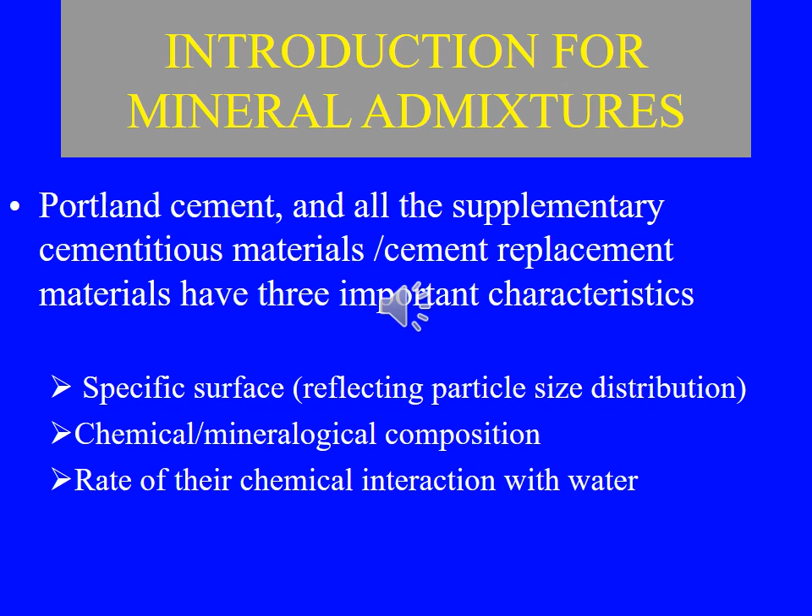For most of them, these properties include particle size distribution, chemical and physical properties, rate of chemical interaction with water, and other materials present nearby.

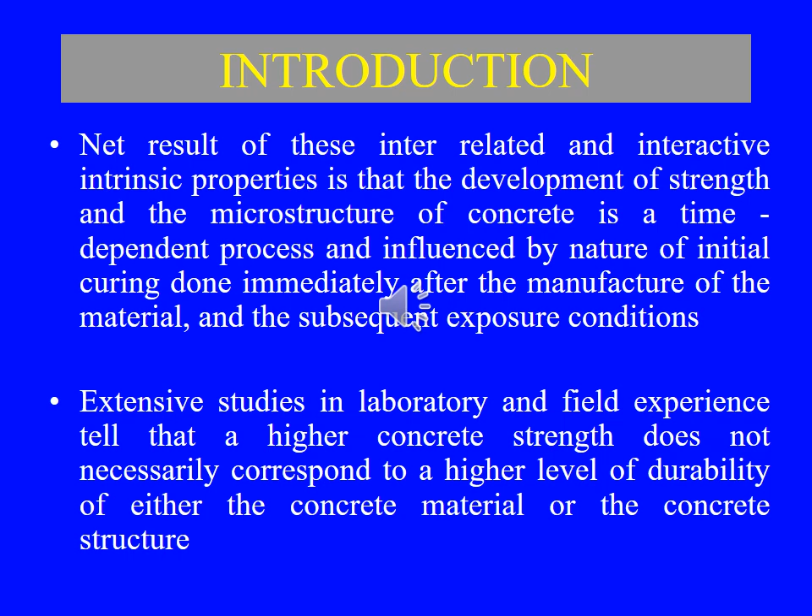The net result of these interrelated and interactive intrinsic properties is that the development of strength and the microstructure of concrete is a time-dependent property, influenced by the nature of initial curing and the properties of these materials, etc.

While initial strength development has its own advantages, like removal of formwork and speed of construction, the durable service life of structures mainly depends upon impermeability, that is, how much is the rate of ingress.

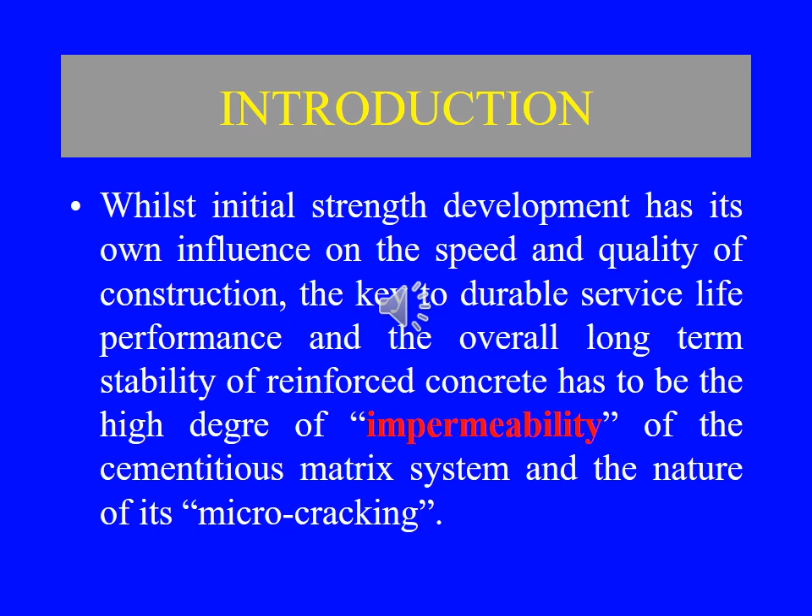of moisture and other ionic substances into the concrete. Cementitious systems involve either only cement, or cement concrete.

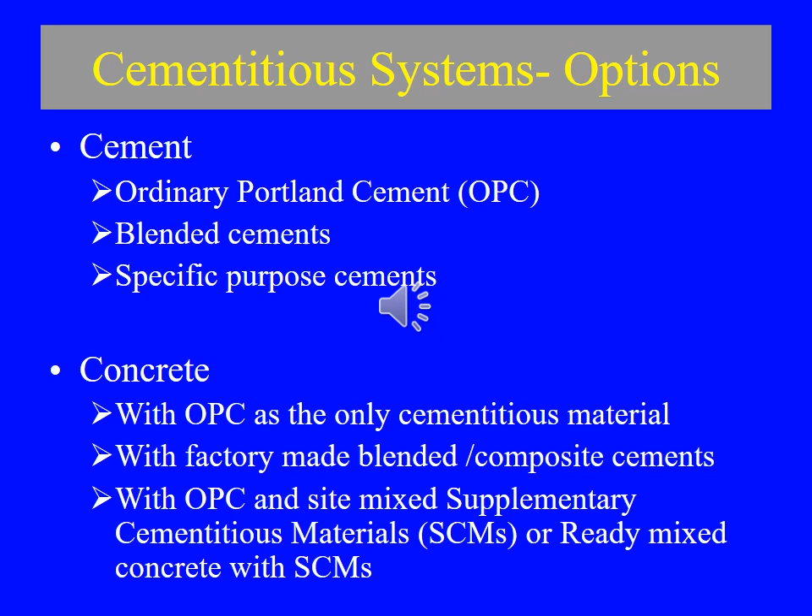To understand the role of the SCMs in concrete, first let's understand the chemical and physical properties of cement.

As we all know, the major component of cement is, by mass, calcium oxide, that is around 64%.

Fineness of the cement is around 290 to 310 meters square per kg, particularly ordinary Portland cement of 43 grade sold in the country. Average particle size of the cement is between 20 to 30 micrometers, that is the D50 - the 50% particles in a given mass of cement are smaller than this size.

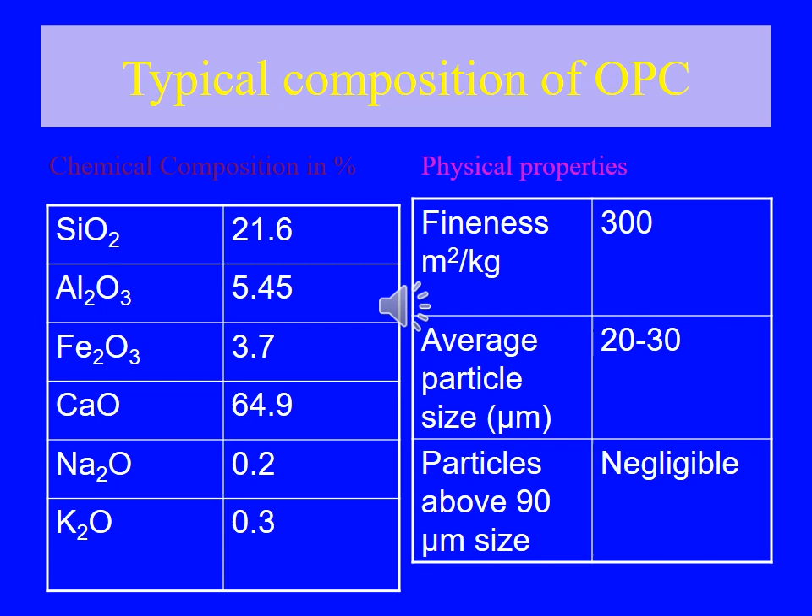This slide shows the properties of cements world over. Belite cement is another name for low heat cement.

Type 1 cement has been the highest type of cement sold in the US, and CEM 52.5 is analogous to OPC 53 grade cement sold in India. CEM 52.5 is a brand of cement, particularly a type of cement in Europe.

This table shows that all these cements, particularly OPC 53 grade, ASTM Type 1, CEM 1, etc., have C3S greater than 50% or so.

As we all know, in ordinary Portland cement, the C3S plus C2S content should be in the range of 70 to 75% for it to be durable.

Hence, only in belite cement is C2S more than 50%, whereas in all the other 53 grade cements, or cements analogous to 53 grade world over, the C2S content is of the order of 20% or so, or even lower than 20%.

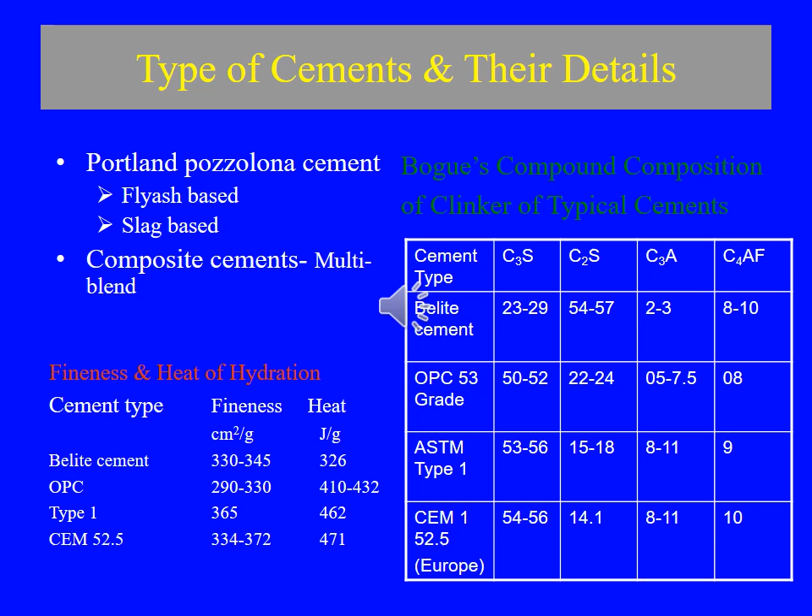A major weakness of cements, particularly type 1 grade or OPC 53 grade, etc., is that they are manufactured for strength, leading to high strength gain at early age.

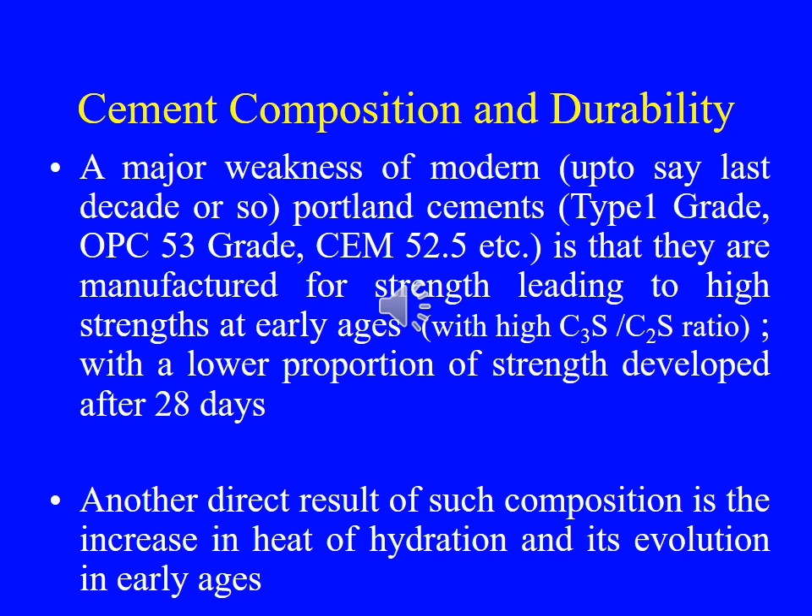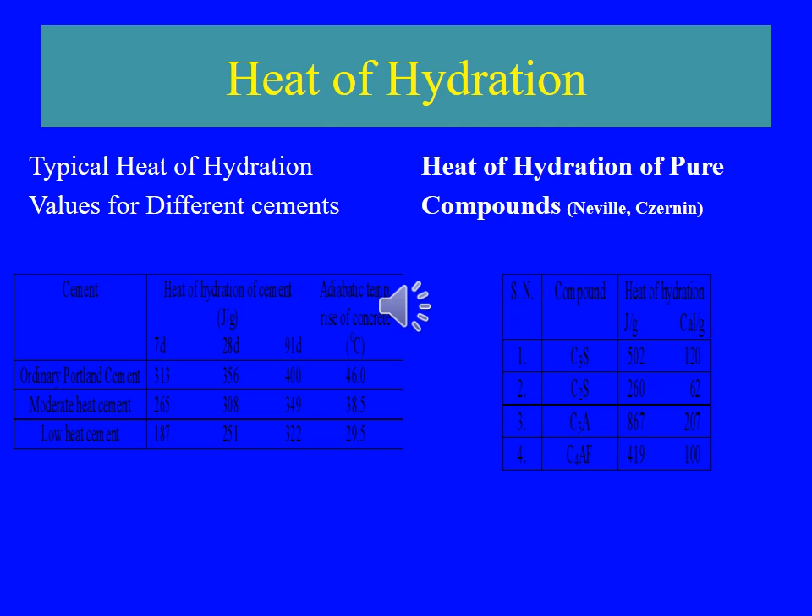As can be seen, in the case of low heat cement, the heat obtained is around 60% of OPC, and as can also be seen, the heat of hydration of C3S is about 2 times that of C2S.

As can be seen, with the addition of fly ash, the heat of hydration can be reduced drastically. These two figures illustrate this.

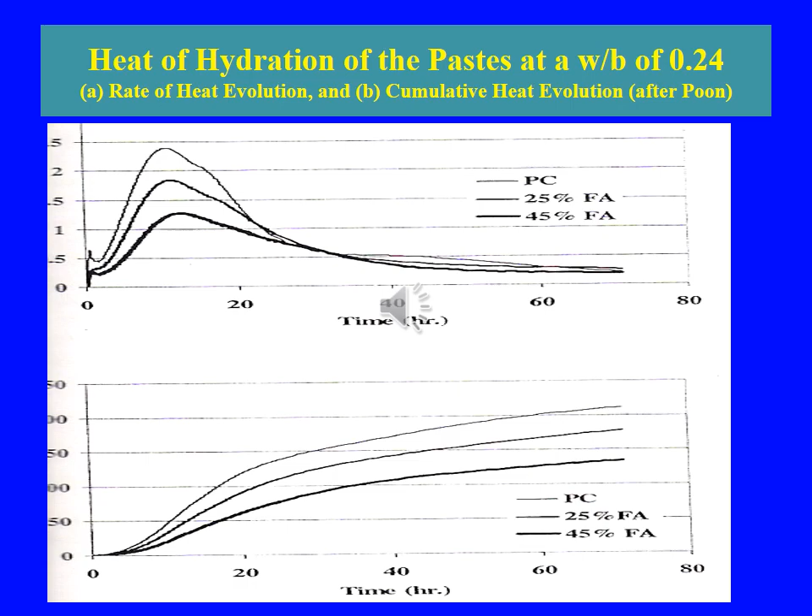Increase in peak temperatures and their much earlier occurrence can give rise to undesirable thermal gradients, and these can create micro cracks in the concrete.

These micro cracks can develop further when loading comes over the structure, and turn into wide cracks. These get interconnected and form paths of ingress of moisture or ions into the concrete.

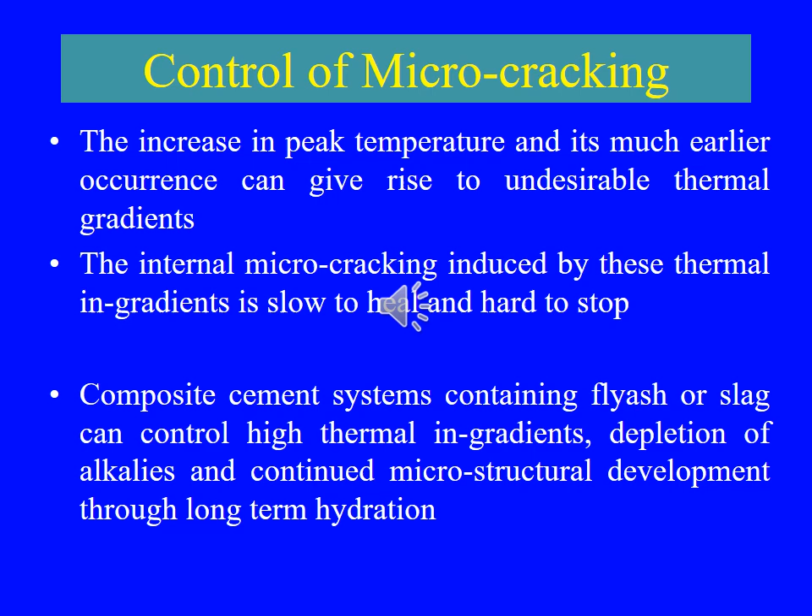With addition of fly ash or GGBFS, not only can the total heat of hydration be reduced, but also the kinetics of reaction, that is the heat of hydration evolution rate, can be decreased, and heat may be evolved over a wider length of time.

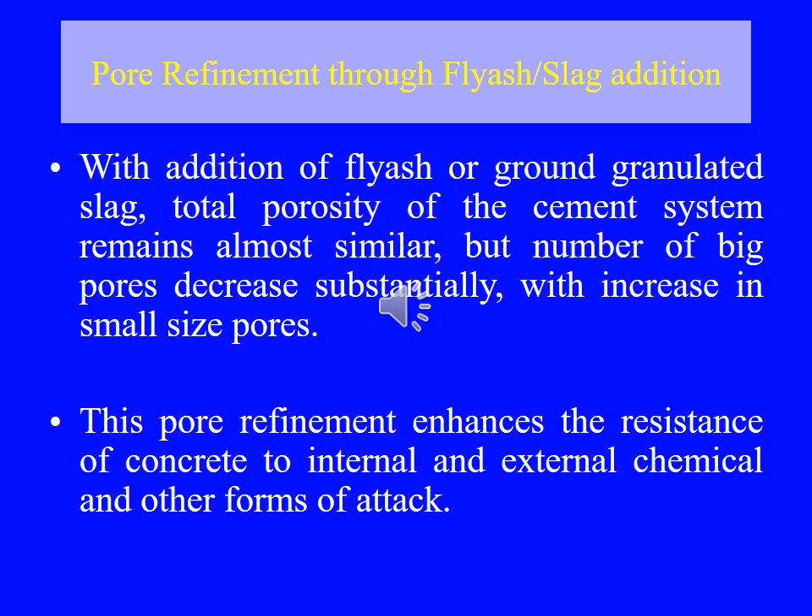This results in lesser microcracking in such concretes containing these materials. So now we discuss supplementary cementitious materials.

Mainly 4 materials shall be discussed.

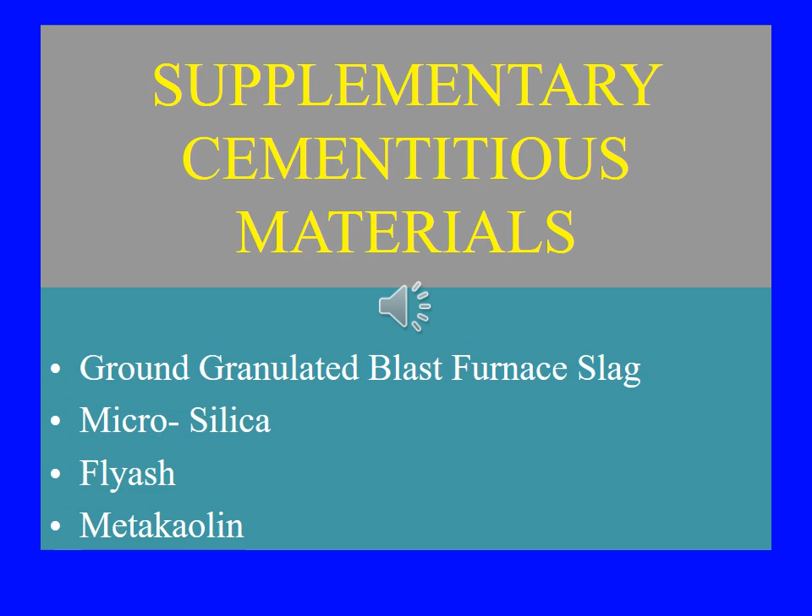Let's first discuss ground granulated blast furnace slag in powder form. Furnace slag powder is a byproduct obtained in the manufacture of steel or in the iron industry.

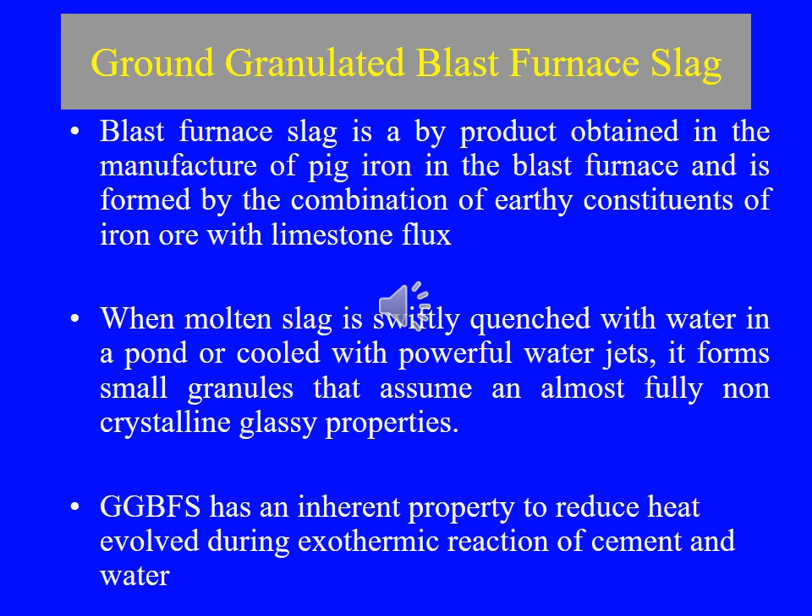This generally contains a property which reduces heat in the exothermic reaction of Portland cement during cement hydration. The properties of slag mainly relate to its fineness, and the fineness of grinding affects its reaction mechanism in concrete.

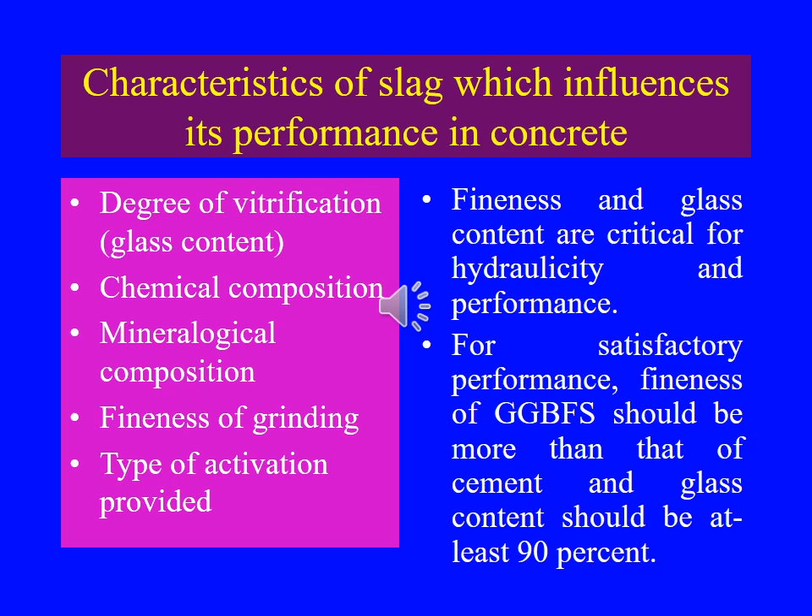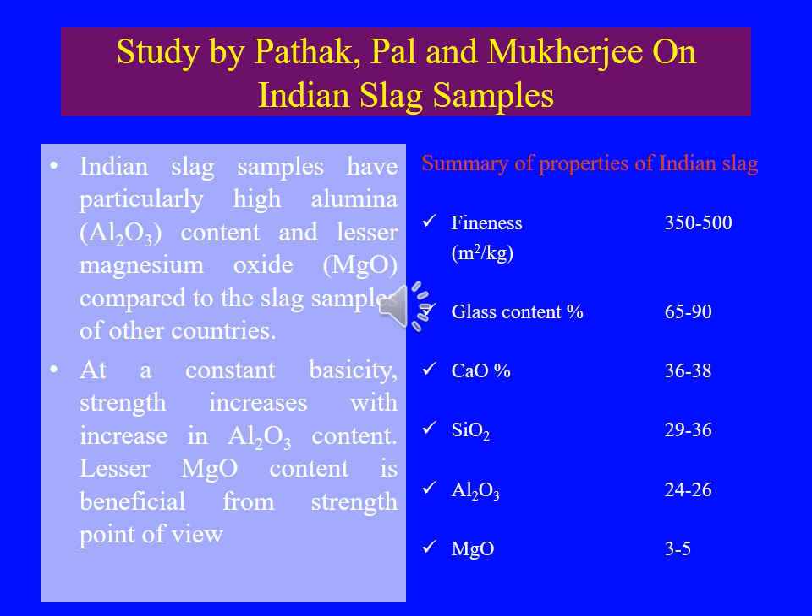Indian slag is generally of fineness greater than cement, and its fineness generally varies between 350 to 500. Because of its high fineness and quality control, we have been exporting slag powder for the last 2 decades to other countries. The price of such powder even in the country is at least equal to that of cement.

Micro-silica is a high-end product which has been used for the last 3-4 decades all over the world. Micro-silica is also known as condensed silica fume, particularly when it is used in liquid form.

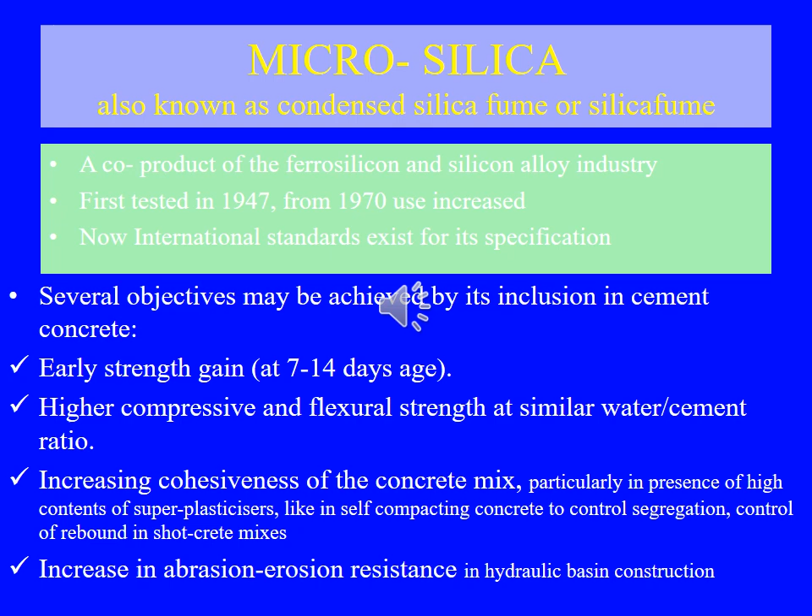The term micro-silica is used when it is used in powder form. This is a co-product of the ferrosilicon and silicon alloy industry. It is mainly used for early strength gain, increased abrasion and erosion resistance in hydraulic structures, and for increasing cohesiveness of the concrete mix, particularly in the presence of high contents of superplasticizers.

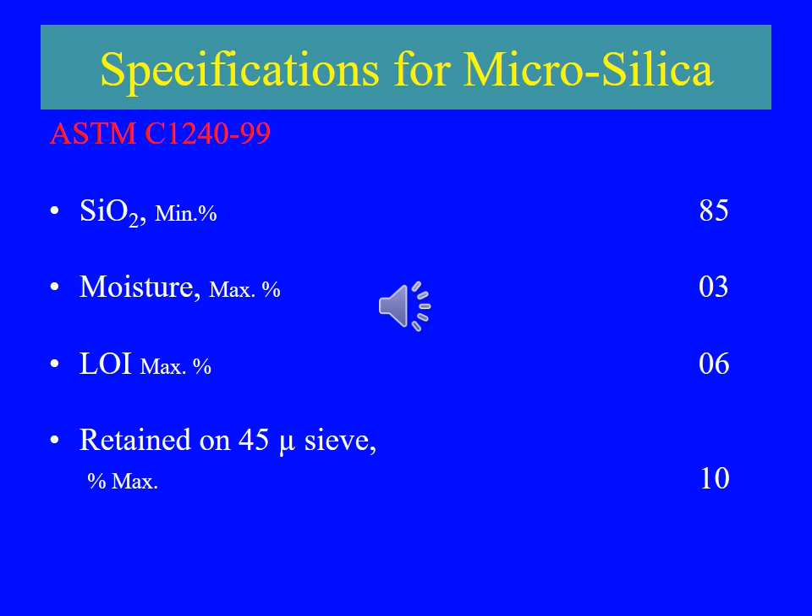The minimum silica content specified in ASTM and Indian standards for micro-silica used in cement concrete is 85% minimum. Similarly, LOI, the maximum content of unburnt carbon or loss on ignition, is specified. This is generally less than 2%, though specifications allow up to 5 or 6%.

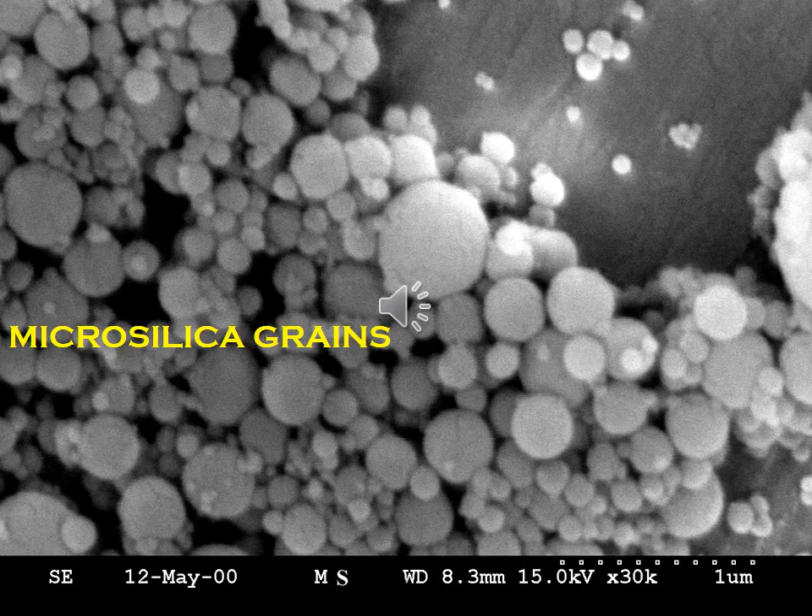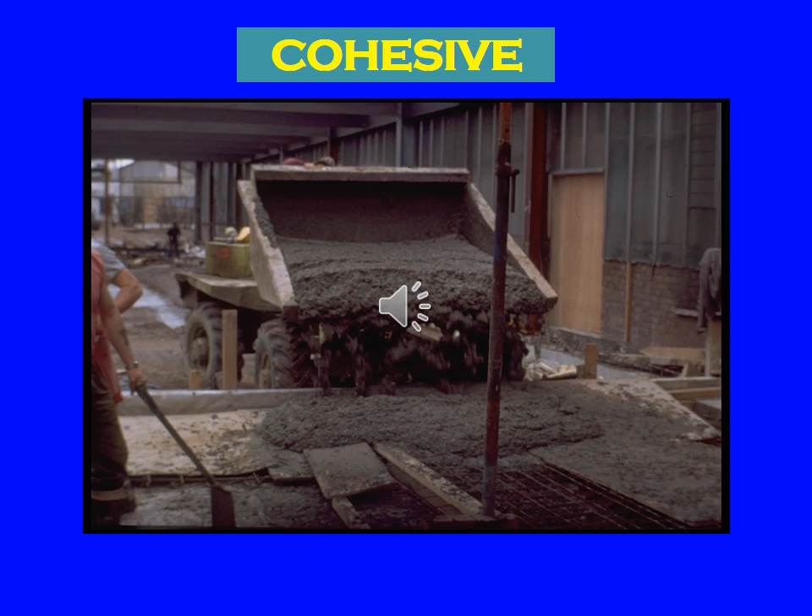As we need to use high quantities of cement concrete, we may need to transport it with dumpers and place it as shown in this figure. When concrete is transported and handled with mechanical means, a cohesive concrete as shown in this figure is very useful. The ultrafine material, that is silica fume or micro-silica, helps in making the concrete as cohesive as shown here.

As we move to the construction of high-rise buildings, multi-story apartments, city malls, metros, etc., we need to use pumpable concrete. For pumpability, concrete must be cohesive. So micro-silica helps in making pumpable concrete.

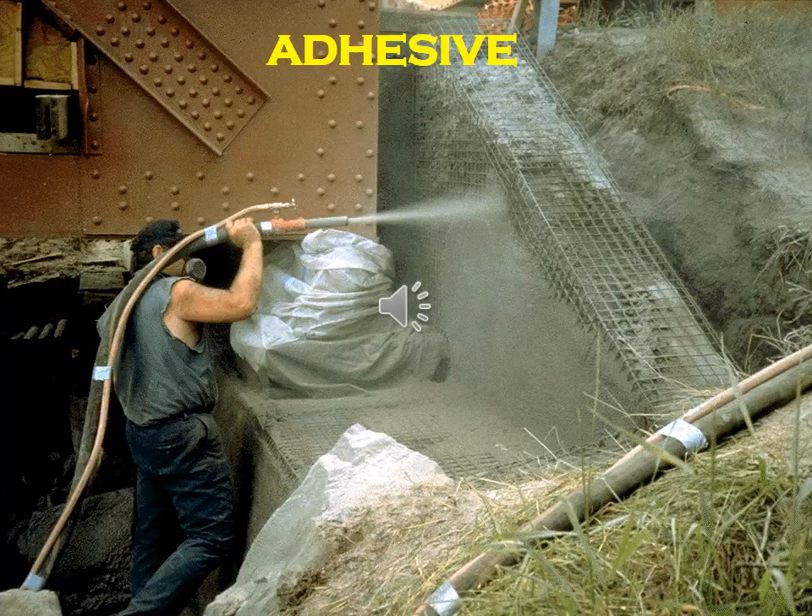This picture shows shotcrete, that is, concrete sprayed with a shotgun over a surface. This type of application is very common in tunnel linings and areas where landsliding is to be resisted, in large areas, particularly say dam construction or powerhouse construction inside mountains.

This type of concrete, when sprayed over the surface, tends to fall down from that surface unless it has sticky properties. Micro-silica makes it sticky so that the rebound of concrete from the surfaces gets low, and the usable concrete increases. If rebound is more, wastage is more.

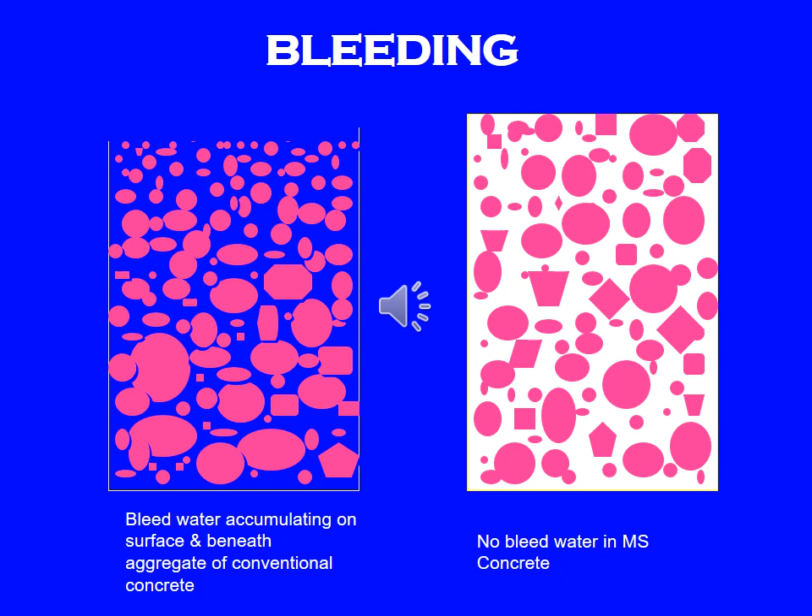As we all know, bleeding is a property of concrete in fresh state. It's a defect where the cement slurry moves up to the surface of the concrete. If micro-silica or such ultrafine powder material is present in the concrete, it resists the movement of the slurry over the surface, that is, the segregation. So the right side picture shows no bleed water in micro-silica concrete.

Fly ash is the foremost, or rather the most popular supplementary cementitious material used in cement or cement concrete in India. So let's discuss it. Fly ash can act as a pozzolanic material if it conforms to specifications laid down by Indian standards or international standards like ASTM, or European codes, etc.

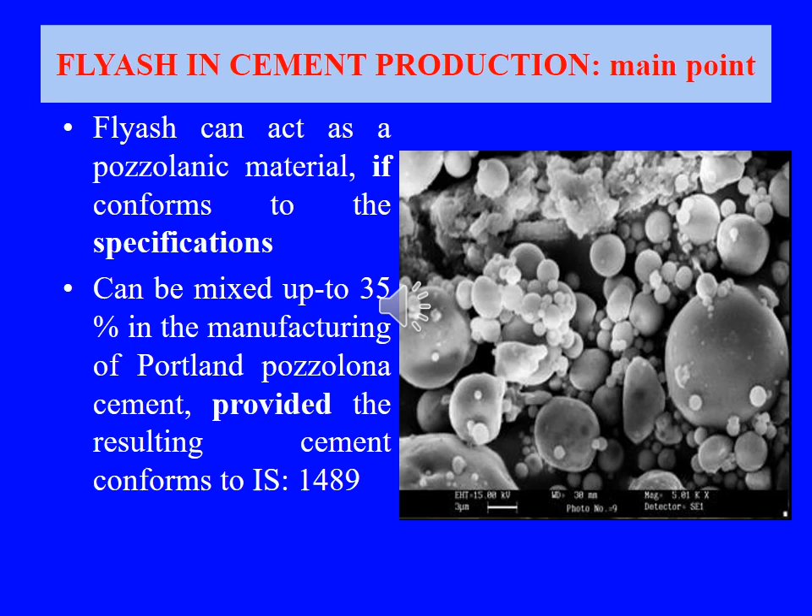As can be seen in the right hand side photograph, the particles of fly ash are mostly spherical. The average particle size ranges between 20 to 30 microns, that is, its average particle size is of the order of that of cement.

Fly ash is mainly classified into two types across the world. One is siliceous fly ash, also known as ASTM Class F fly ash. Another is calcareous fly ash, known as ASTM Class C fly ash. 90% of the fly ash produced in our country is siliceous fly ash.

Mainly, the presence of amorphous silica particles in fly ash reacts with the calcium hydroxide produced during the hydration of cement and forms CSH gel-like material, which gives strength to the concrete. The next slide further illustrates it.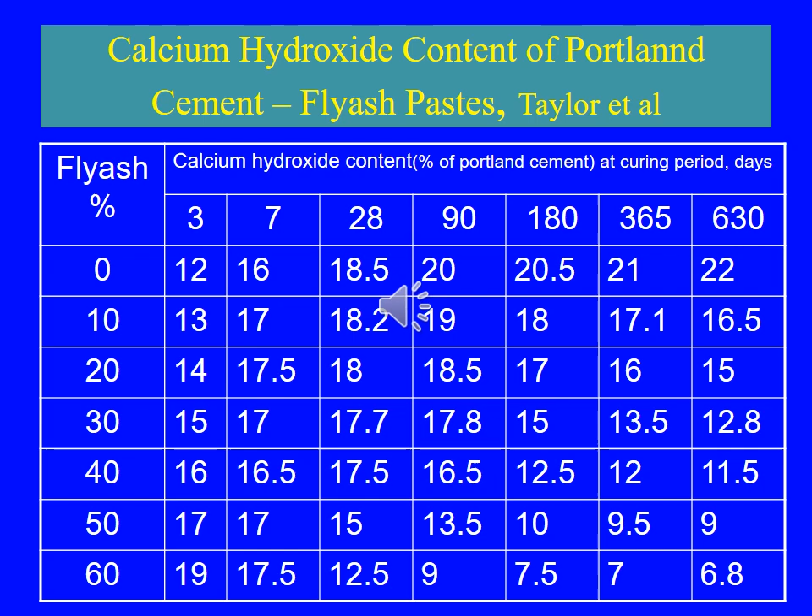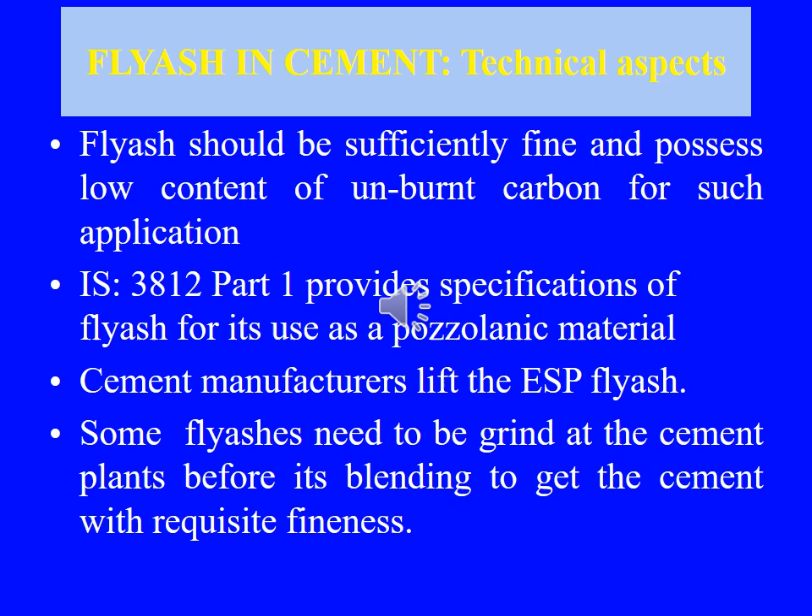Simply adding any fly ash in concrete is not going to help. It should conform to minimum standards as laid down in the IS code to be used as a pozzolanic material, and the fly ash used in cement concrete should be obtained from electrostatic precipitators of coal-based thermal power stations. Fineness of fly ash should be at least the same as, or finer than, cement.

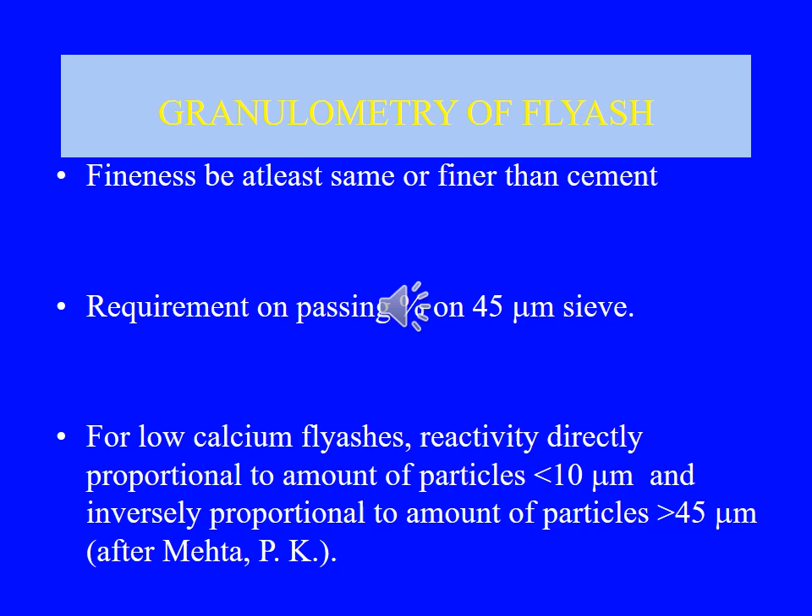The residue on 45 micron sieve is a major criterion for quality of fly ash. For low calcium fly ashes, reactivity is directly proportional to the amount of particles less than 10 microns and inversely proportional to the amount of particles greater than 45 microns. As can be seen in this slide, if the percentage of material lesser than 10 micron size is greater, the strength obtained of concrete, particularly at early age, is high.

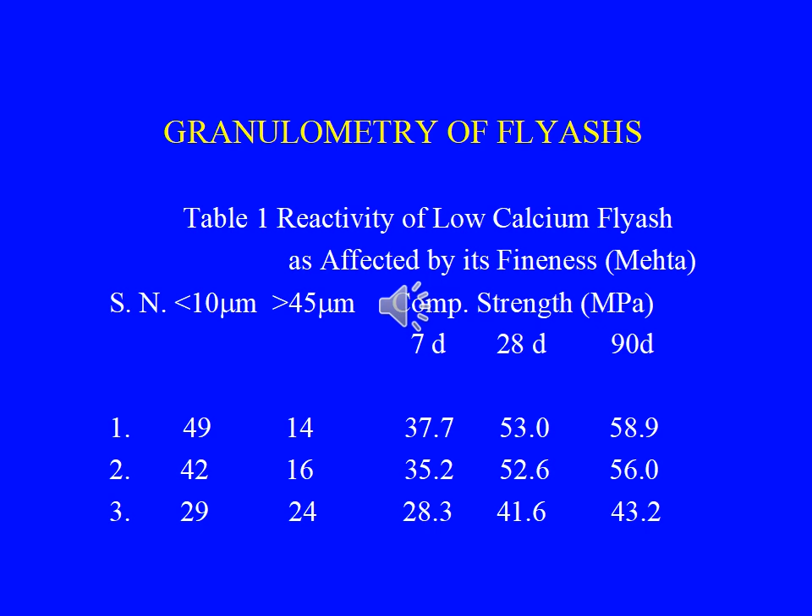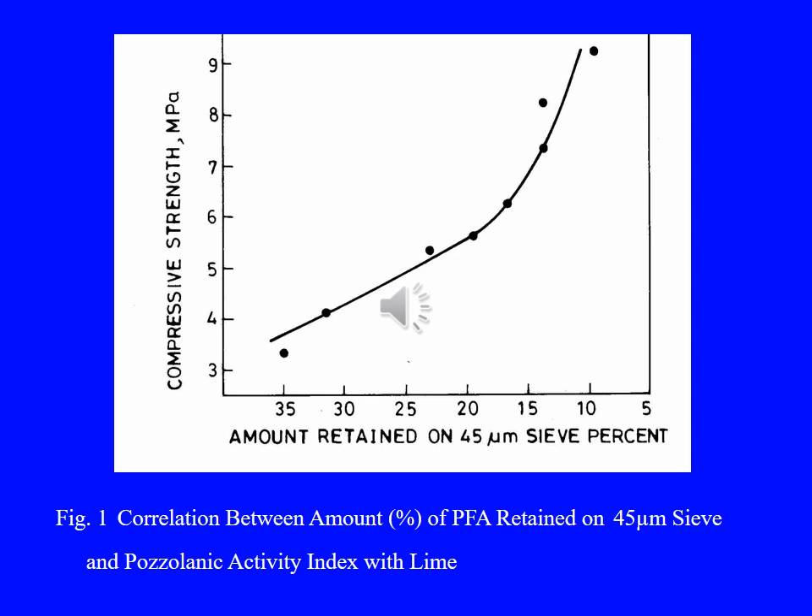Contrary results are shown in the third column for 45 micron, showing the compressive strength variation with the amount retained on 45 micron percentage. This shows that if the 45 micron percentage decreases, the compressive strength increases. The pozzolanic activity index, as defined in IS 1727, is higher if the amount retained on 45 micron percentage is lower, as shown in this figure.

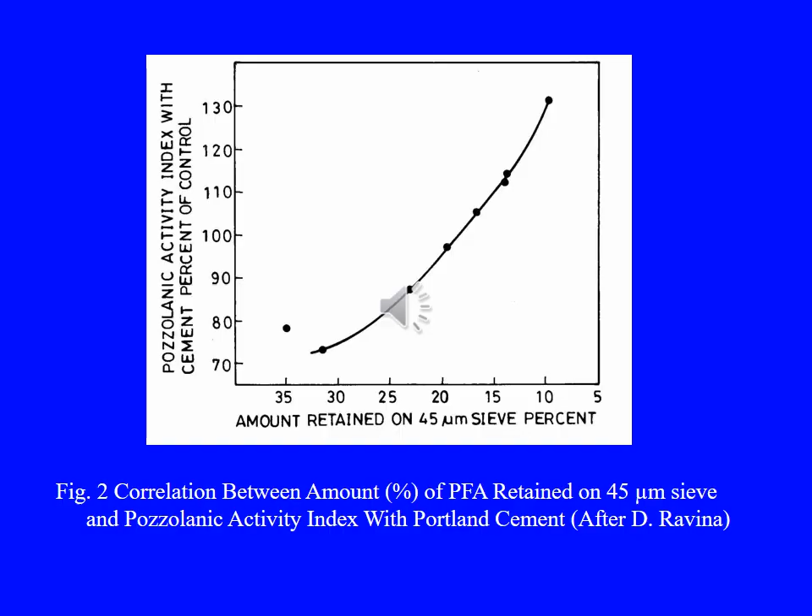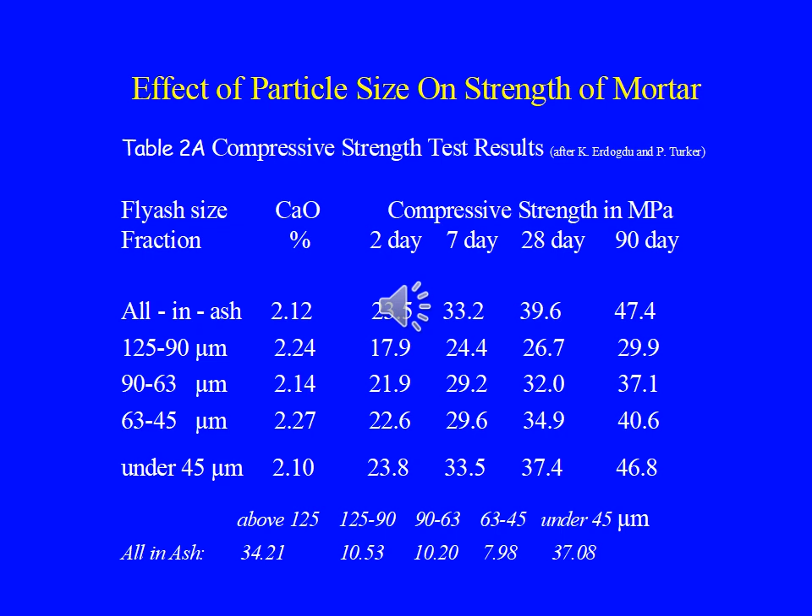Our issue is mainly that the fly ash recommended in the last 2-3 slides is obtained in very less quantities from thermal power stations. So the research was targeted to use all-in fly ash, a mix of fly ash obtained from all the fields of the ESPs in thermal power stations. Luckily, the results of such investigations favor using all-in fly ash, because it gives you a spectrum of particle sizes, so some particles help in densification of the matrix and so on.

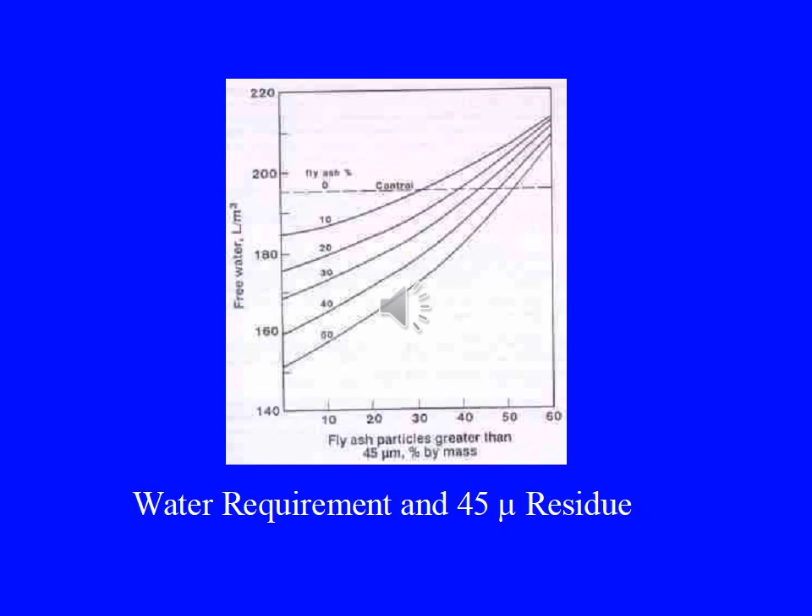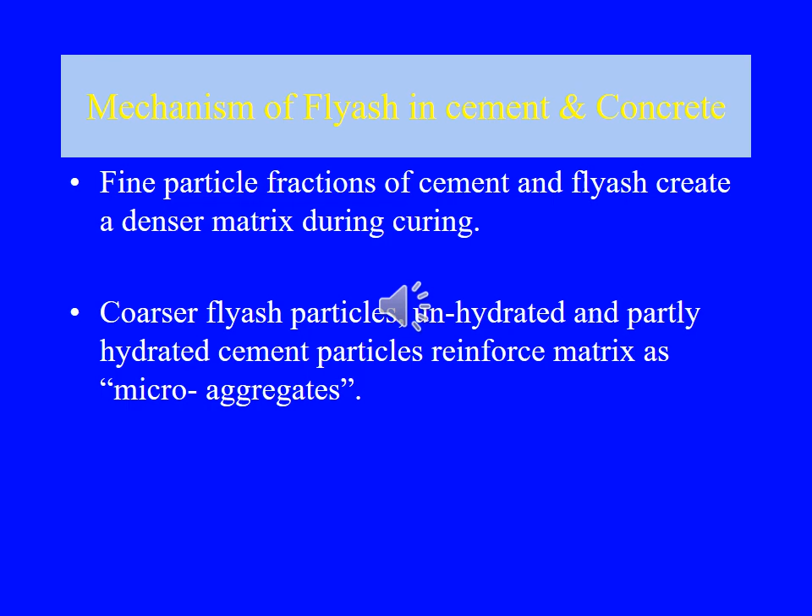The fine particle fractions of cement and fly ash create a denser matrix during curing, and coarser particles and unhydrated cement particles remain as such, acting as micro aggregates in the concrete. This is particularly true in high volume fly ash concrete.

Let's discuss the basic properties of fly ash and its specifications as provided in IS 3812. We should ensure that any material called pozzolanic must have Al2O3 plus SiO2 plus Fe2O3 combined percentage not less than 70%. This is well accepted all over the world.

Another point is physical properties, which we have been discussing, that is how many particles are reactive. If we have reactive silica minimum as 20%, then only the fly ash can act as a pozzolanic material. Otherwise, it acts only as an admixture in concrete.

The role of pozzolanic material is that it reacts with calcium hydroxide to form CSH gel-like structure at normal or ambient temperature. Whereas if it is used as an admixture alone, the reaction with calcium hydroxide doesn't take place. The fly ash particles remain as it is, like micro aggregates in concrete, or even finer particles which are not amorphous in nature, with particle size lesser than 10 micron, may be there. They only densify the matrix; they do not react with calcium hydroxide.

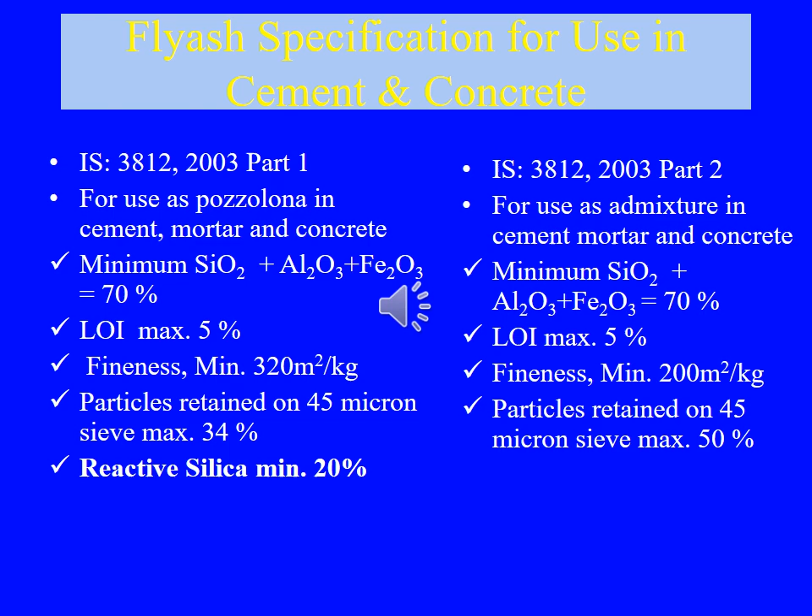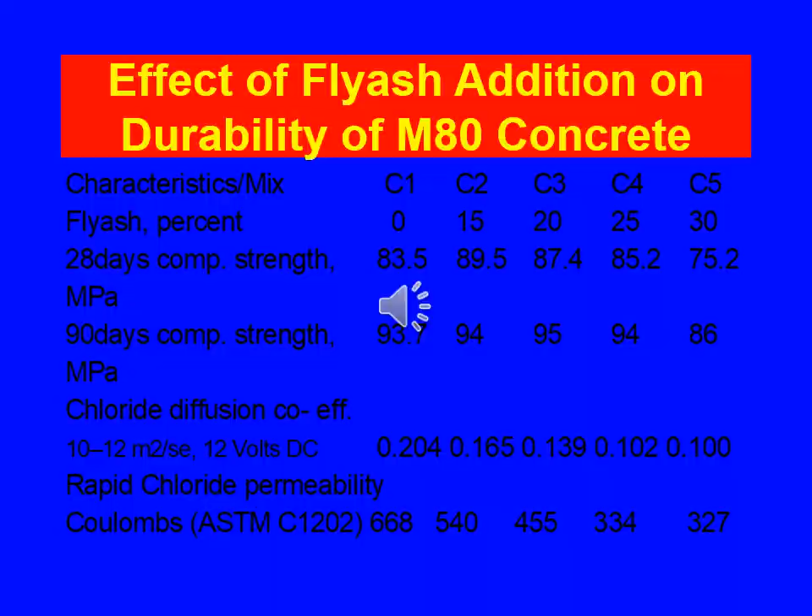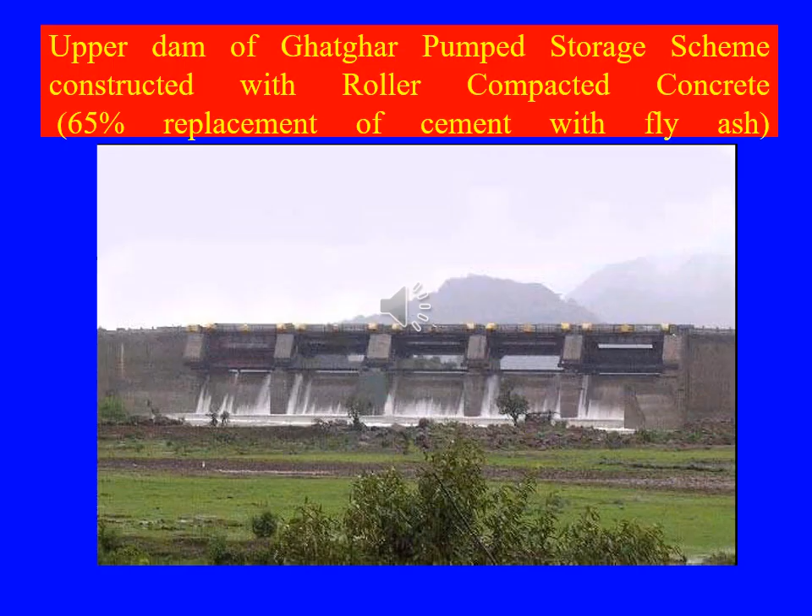The above property of reduced chloride diffusion has been the main factor in deciding to opt for fly ash based concrete in the construction of the famous Mumbai Worli sea link project, Bandra Worli sea link, crown jewel of India, glory of India. This construction took place around 2003, 2004, 2005, and it is serving the nation very well. In the last 15 years we have seen no deterioration of the concrete structure, and it's a landmark structure of the country. The mega structure made with fly ash concrete in the last decade has been the

Ghatghar dam, constructed with roller compacted concrete.

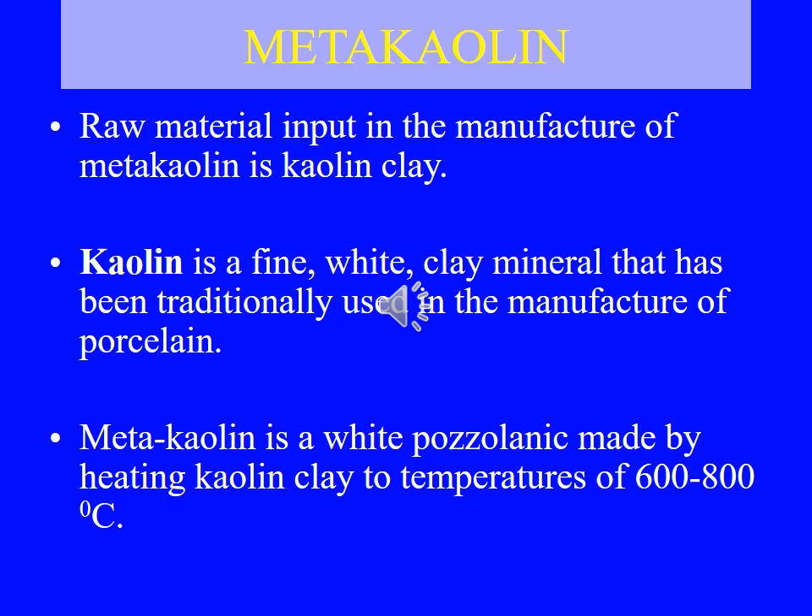A major indigenous supplementary cementitious material in the country is Metakaolin. This has got popularized, and an IS code has come around 8-10 years ago for this in India. Raw material for this is kaolin, particularly available in Rajasthan. Metakaolin is a white pozzolanic material made by heating kaolin clay to a temperature of around 600-800 degrees centigrade and finely grinding this material.

It reacts rapidly with the calcium hydroxide in the cement paste, converting into strength bearing compounds. Metakaolin products conform to ASTM standards, and of course metakaolin should also conform to the Indian standard code. Particle size is significantly smaller than cement particles, of the order of 1.5 micrometers, with a specific gravity of 2.6 to 2.55 or so.

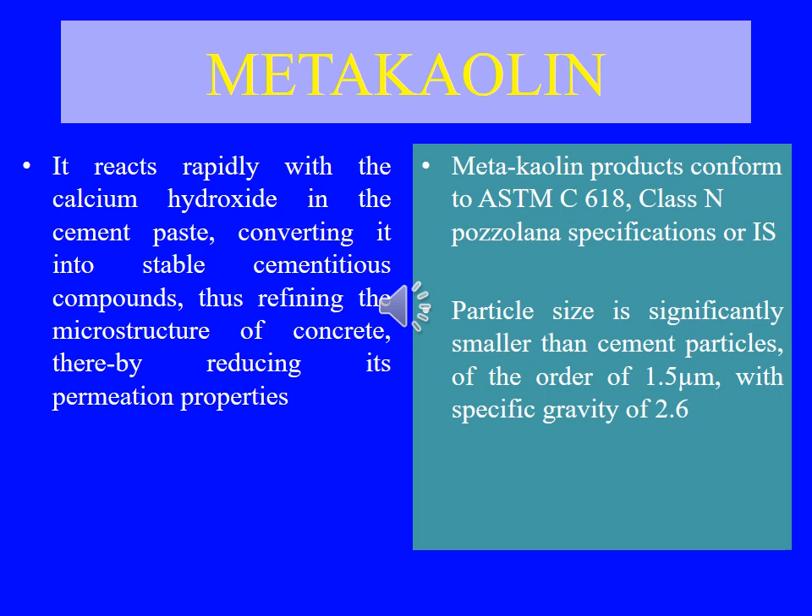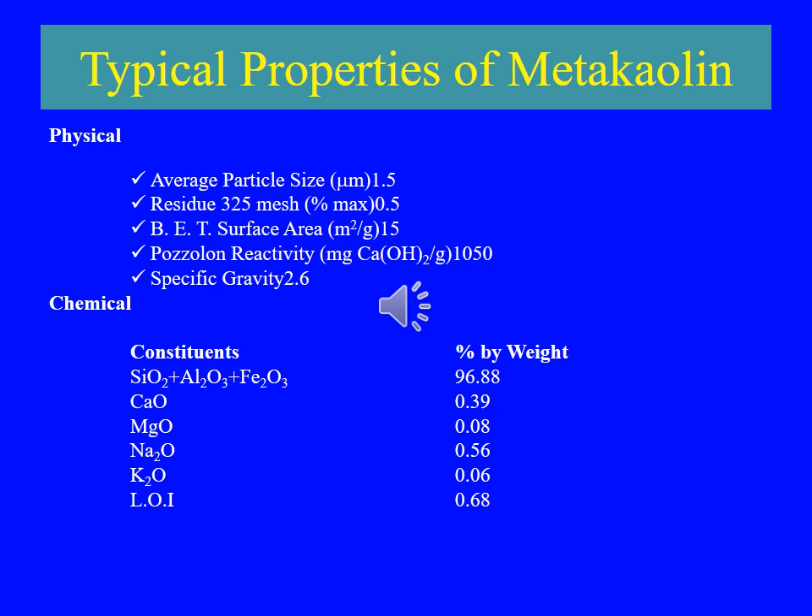Typical properties of metakaolin, as produced by a firm 20 Micron Limited in Vadodara, are as follows in this slide. The average surface area is of the order of 15 square meters per gram, around 5 times finer than that of cement. The SiO2 plus Al2O3 plus Fe2O3 content is around 96 to 97%. Calcium oxide is very minimal, and LOI is less than 1%.